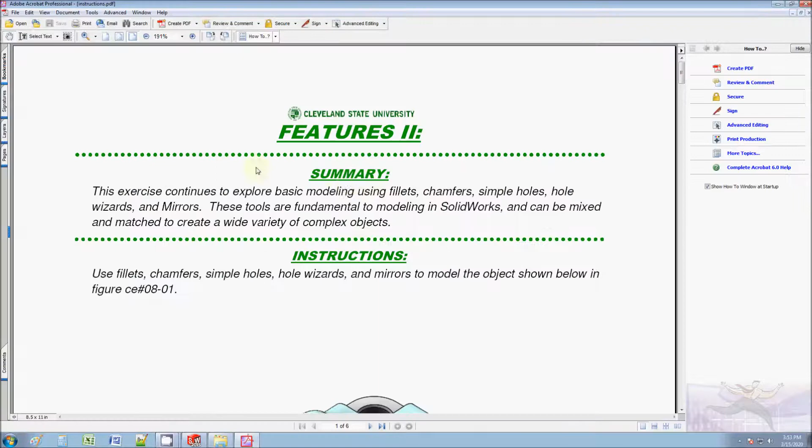Okay, so today we're going to talk about features 2, which is just a continuation of modeling in SolidWorks. We're going to learn how to create these fillets here, the chamfers, but more importantly the Hole Wizard. The Hole Wizard is a tool you use very frequently. It lets you build all kinds of counterbores and tapped holes and things like that.

And one of the main benefits of it is that if you use it right, you can extract the whole nomenclature on your drawing, which can save you a lot of time. So you will see the benefit of this tool as we progress through this tutorial. As you can see, there's no start file. Everything's going to be built from scratch, but we do have the solution.

So what I'm going to do is just start creating a new file in SolidWorks, and we're just going to create a new model from scratch. Here's a new model. I'm just going to set this up. Remember, anytime you create a new model, you have to change the options, tool options, change the standard to ANSI and change the units to IPS. We're going to do that for every model. Also, it's good to save your model. I'm just going to save it as exercise number 8, and now we're ready to go.

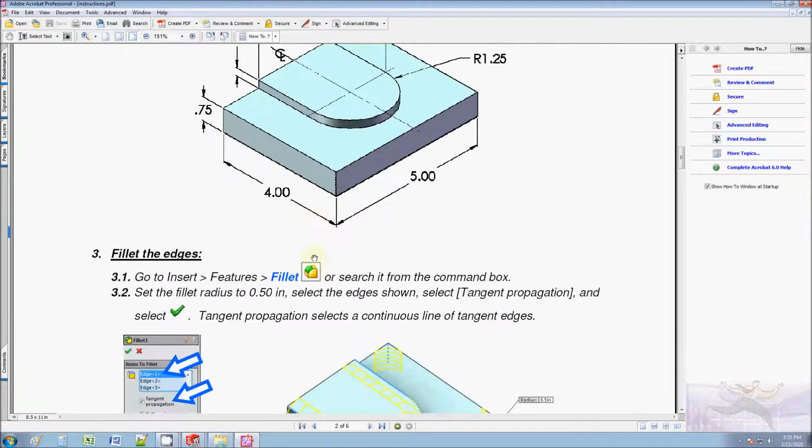So if we look at the first step, we're not given a lot of direction as far as how to build this. So we're really relying on you to review what we learned in the last tutorial. There's a lot of ways you can go about this. You can build this with 2 extrusions, one extrusion for that, another extrusion for that. You can build this with one oversized extrusion and then an extrude cut, just like they would in machining. In machining, you start with an oversized block and you mill it down.

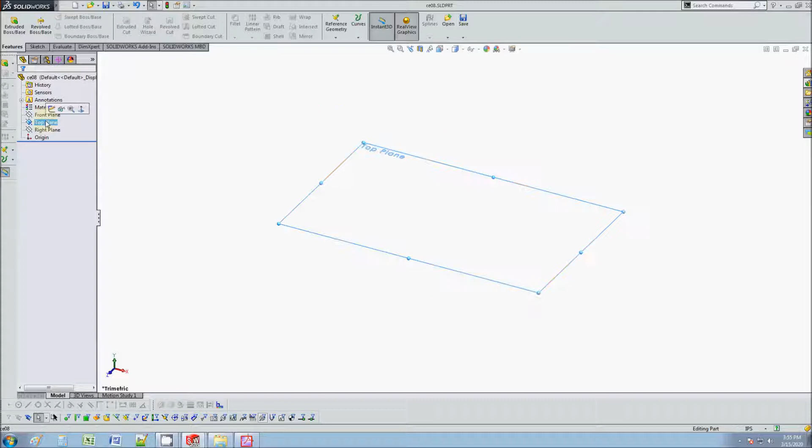Or you can build this from the side. You draw the sketch, extrude that back, and then use the revolve tool for that and extrude that towards the back. So as you can see, there's a lot of different ways you can approach this. So that's the first step. There's really not anything new here. It's a repetition of the last demo.

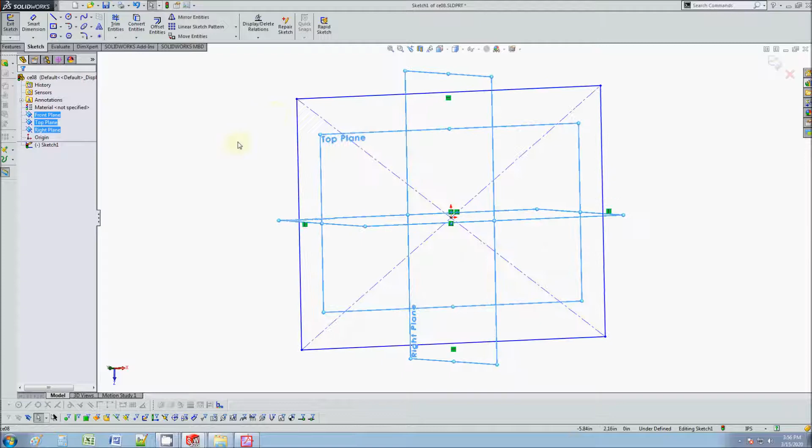So again, I'm just going to build this using the center rectangle tool on the top plane, because I feel like it's a flat piece that you would look at from the top down. And I'm going to snap to the origin. Again, that's very important, because this piece is relatively symmetrical. I want these to be centered about the model because it's really good practice. This is why I'm using a center rectangle tool and snapping to the origin.

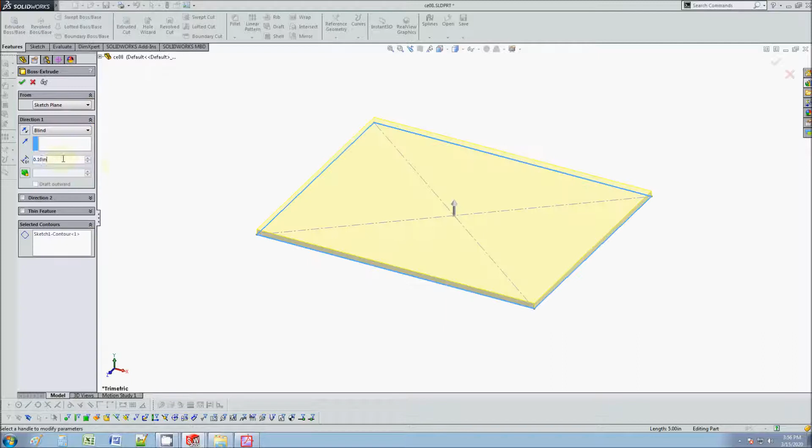And if I look at the isometric, I'll notice that this is 4 and this is 5. As you can see, this is fully defined, which is very good. For instance, if I deleted this, you see this is not defined. This is not good. It doesn't know how long it is. The model's got to know how big everything is. So this looks pretty good. I'm going to exit out, and I'm going to extrude this 1 inch: 0.75 plus 0.25.

So I'm going to simulate the way this is made in real life. Sometimes I've had machinists call me and say, I need to see how you build it because it's going to help me figure out how I'm going to program it on the CNC machine. So I always like to build the model like it would be made in real life. So that's 0.75, 0.25.

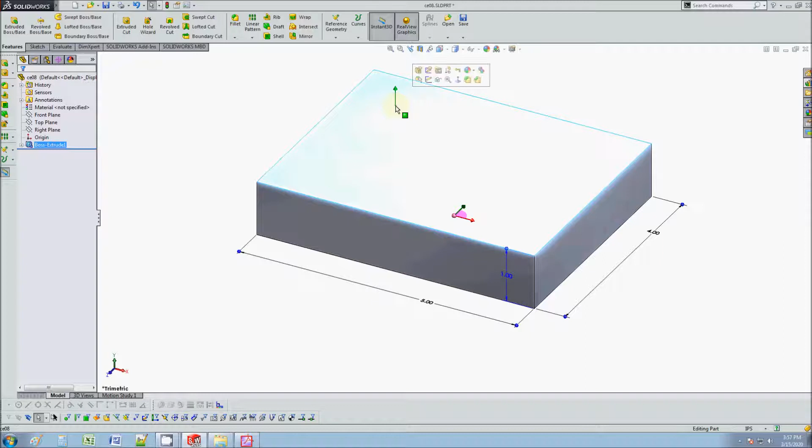So now I'm going to build this feature. I'm hitting Control 8 to stay normal to. I'm going to do that by sketching inside this feature. I need to draw the box of this. I could do it with a corner rectangle tool. I could just do this. But to show you another way, convert entities is also good for this.

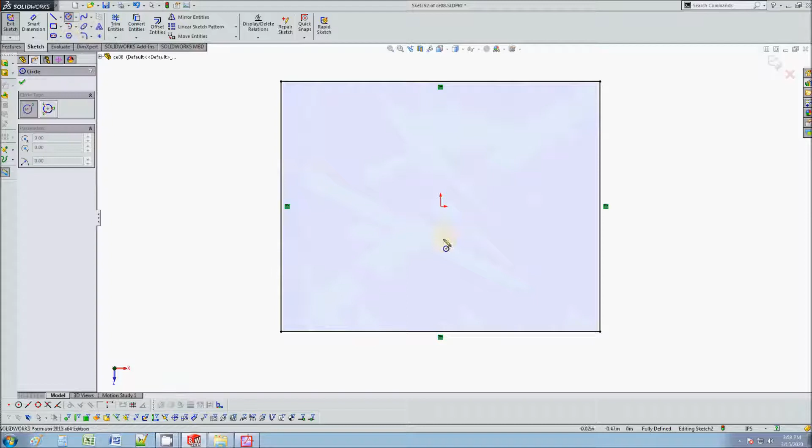The way it works is you select the edges, and you hit Convert Entities, and it converts the edge into a sketch. So I'm going to just use that just to show you something different. Then I'm going to continue on and draw lines and circles to match the sketch that we saw.

Here may be a new tool for you. It's called the Trim Entities tool. When you click this Trim Entities tool, there's a power trim, meaning you just click, hold the left mouse button, drag and drop, and it trims anything in its way. I like that tool because I remember in ancient AutoCAD programs you had to pick what you extend, what you trim, it's a couple clicks, but with a power trim you just drag and drop, and it's pretty cool. So that looks pretty good.

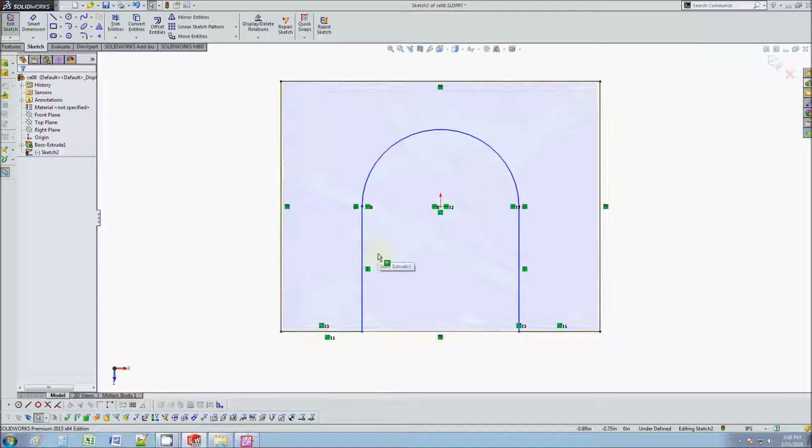I like it, but again, it's not defined, and the reason for that is because I didn't put a 1.25 dimension. So I'm going to go ahead and put a 1.25 dimension on that line. And as you can see, it's fully defined now. So there's many different ways you can approach that using the tools that you see here. I'm going to exit out of the sketch.

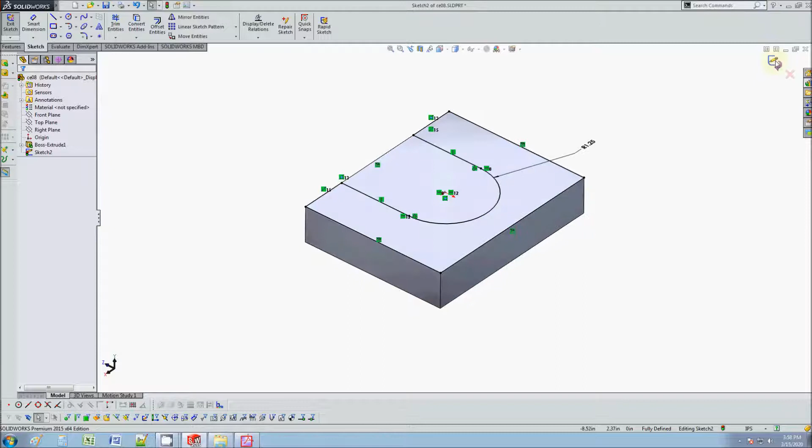I'm going to hit Features and hit Extrude Cut, and I'm going to set this to 0.25. It knew what I wanted to select because there's only one sketch to select, but if it didn't know, I would have selected it here from the tree. This is 0.25, cuts in just like that, and looks good. Okay, moving on to step 3.

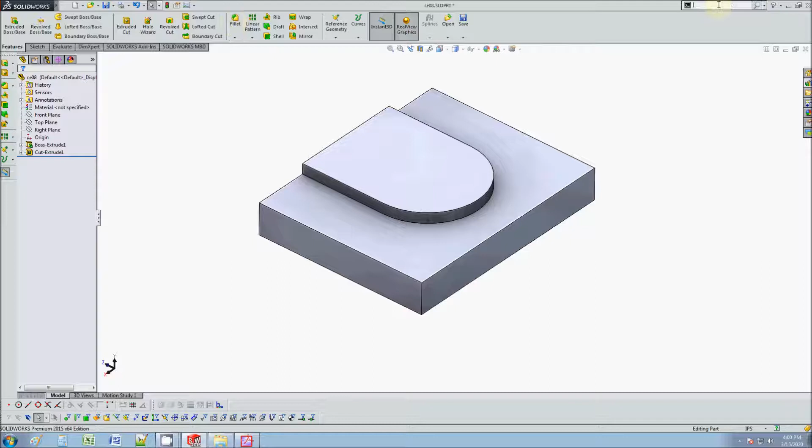We're going to learn about the fillet tool. So here's the fillet tool. You can also find it here. And there's many different fillets that are out there: variable fillets, full rounds, all of that. Fillets are really just to make the part more ergonomic, meaning it's easier to use, it doesn't hurt the operator.

But you usually just spec that on an injection molded part so that it can easily eject from the mold, and also because it makes sense for injection molding. But for machining, it doesn't really make a lot of sense. Usually you put a chamfer if you really need to break a sharp corner. Fillets are mainly for the injection molding industry, not really for machining. So let's talk about how you implement them.

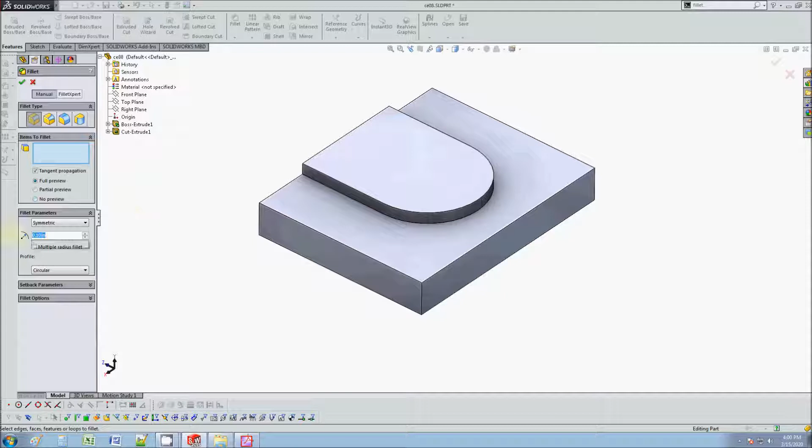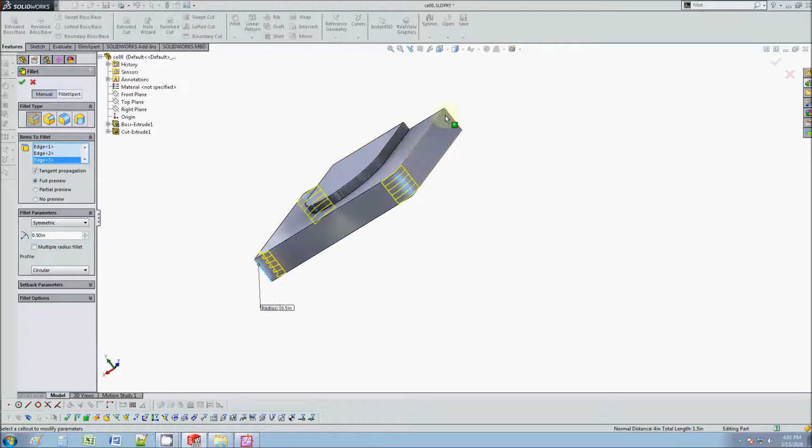First, you put a dimension here for the size, and then you pick the edge that you want it on. You can also select it asymmetrical, so if you want some sort of elliptical fillet, you can do that too. But we're just going to stick to symmetrical for today. We're going to stick to 0.5, and we're going to select each of these edges, and also this edge on the top.

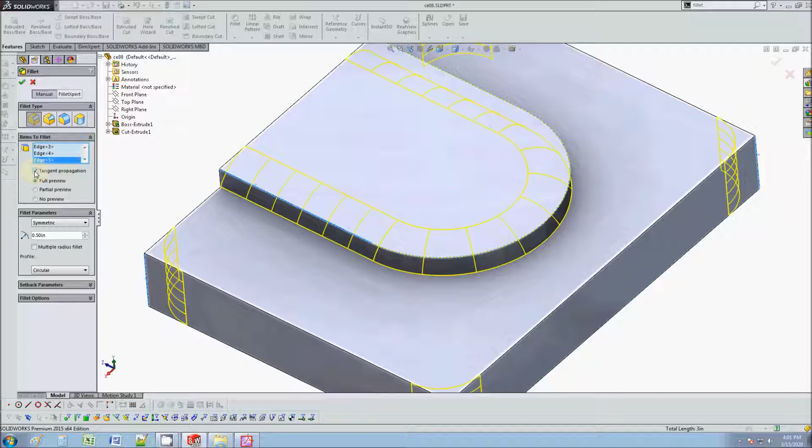Do you notice how it transitioned that edge all the way around? It's because I have tangent propagation on. If I turn it off, you'll notice that the fillet is only on one edge. So as you can see, it can be either or. This is a very useful tool. In some cases you'll need that, in other cases you won't need that. So just be aware of that.

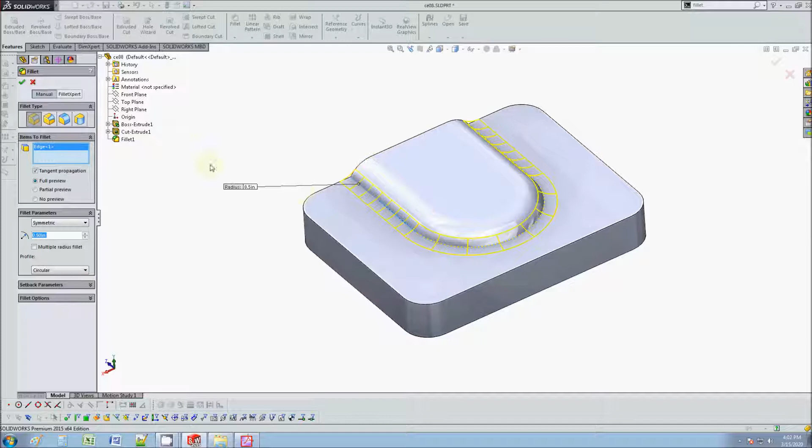It's also a good idea to put a fillet on top of another fillet. What I mean by that is it's good to do fillets in multiple steps, because sometimes you can't get the effect that you want in one step. So when that happens, I just select the fillet tool again and add another fillet. For instance, if I tried to do that in one step with this, it'd give me a lot of problems. So it's very common to put fillets on top of other fillets.

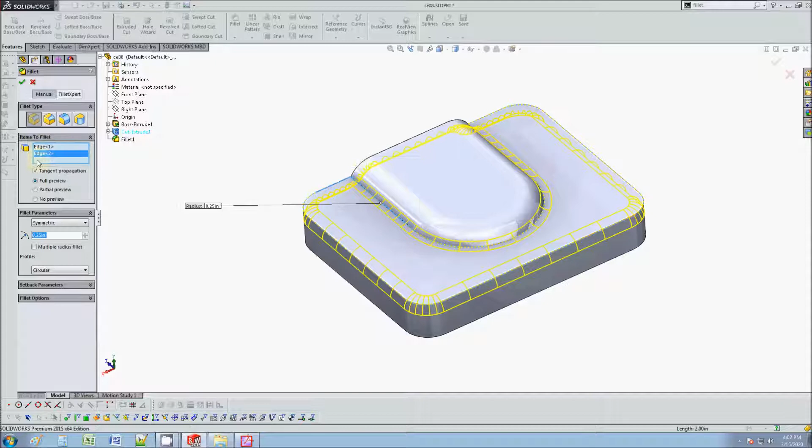In this case, I'm going to do a very special fillet. I'm going to select this whole surface, change this number, and as you can see, it figures out that I need a fillet on all those edges. I could have done that by just selecting each edge like this. But just wanted to let you know, you can select not only an edge, but also a surface, and it will figure out all of the edges around that when you include the fillet.

Okay? So that's what that looks like. And as you can see, you can go back in time anywhere you want, okay, to see every step.

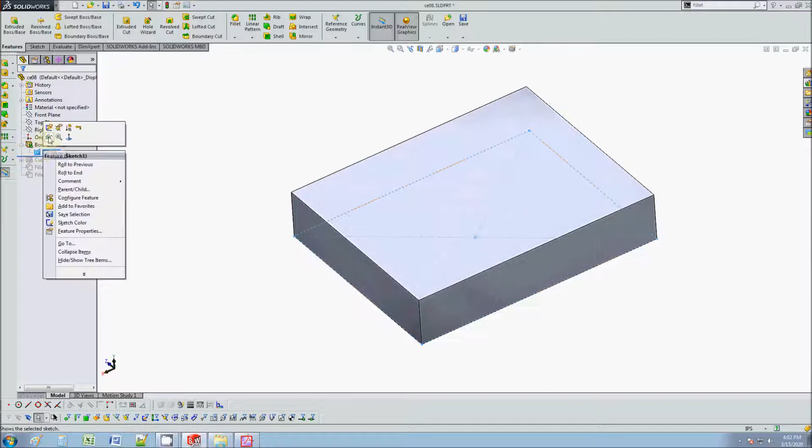Another thing I wanted to talk about real quick is when you create a sketch, I mentioned that you can type in a number, but you can also type in an equation. I'm not sure if I went over that. So for instance, you can type in 2/3 and it figures out that value as an equation. You don't have to put 0.67 directly. And also you can put an equation.

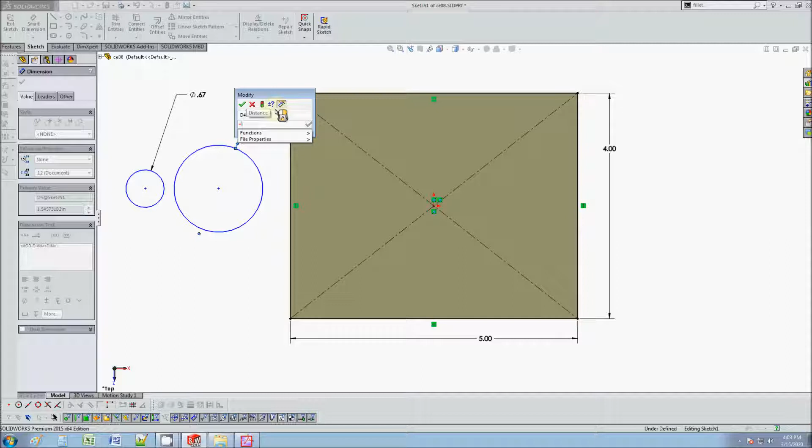So just like Excel, to start an equation you gotta hit the equal sign. If I put an equal sign, you can put an equation. So just like Excel, you set a reference, then let's say we want to do times 3. Alright, so now this says that this diameter is 3 times the size of that one. When you do that, you get a sigma. It means there's an equation tied to that value. So now when I change this to 1, you see this automatically updates by 3.

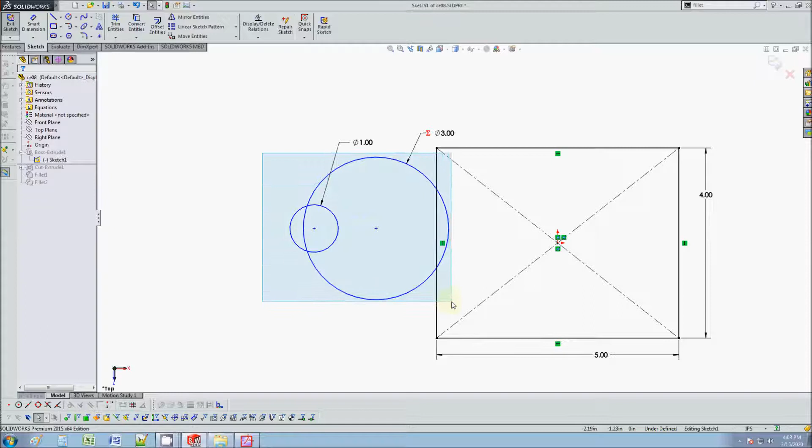So a lot of suppliers, a lot of companies that use SolidWorks, they like to use the equations because it's easier. It updates. It makes the workflow a lot easier because everything updates in one shot when you use an equation. Okay, so I'm just going to undo that, because otherwise I'll get a bunch of errors.

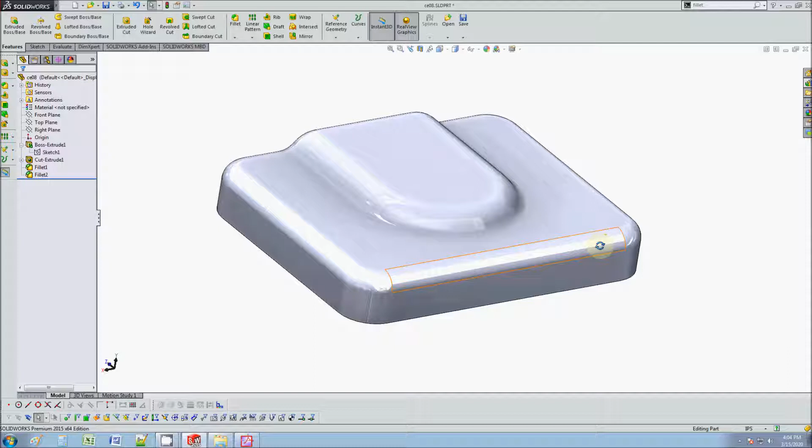And sometimes I've noticed that when you get an error, it's best to just delete and start over, or just hit undo, as opposed to try to troubleshoot it. Sometimes that tends to save you some time and tends to be an easier solution.

Okay, moving on to the next tool, which is the Hole Wizard tool. So again, there are two main benefits to using this. One is that it extracts all of the hole nomenclature on your drawing, and also that it uses industrial numbers that are uniform across the industry, which will save you a lot of time. So I'll show you how these two things are going to be beneficial for you later in the tutorial.

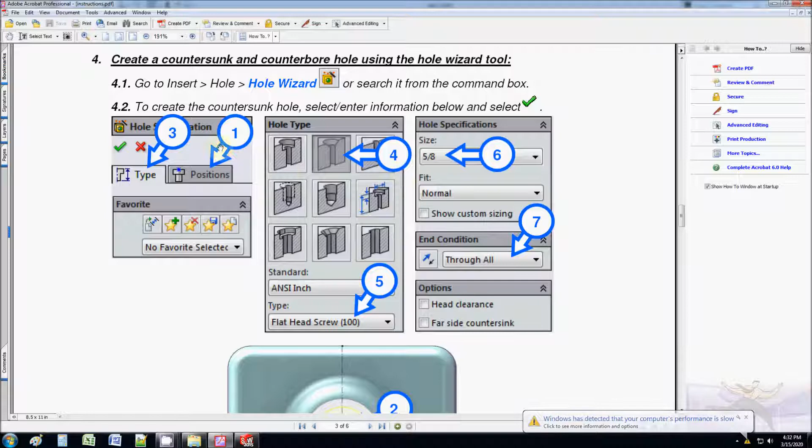So when you follow this guideline, all you got to do is just follow the steps. There's step 1, step 2, step 3, step 4. So that's how you use the Hole Wizard tool. So we're going to go ahead and use the Hole Wizard here.

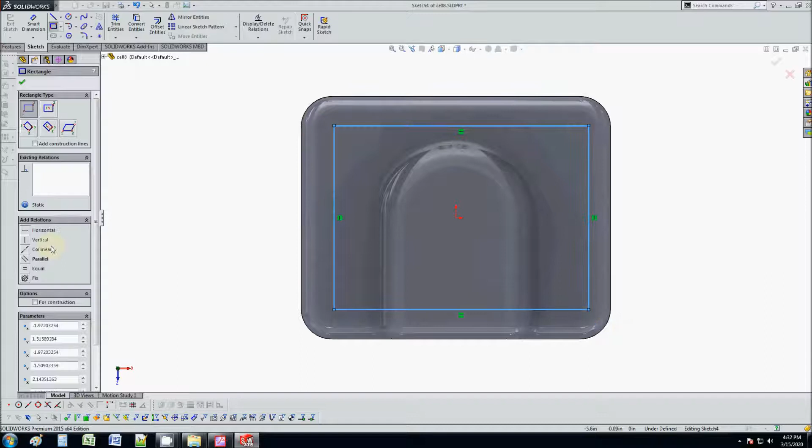Now traditionally when you set the position of the hole, you first create some sort of array box like this, set it for construction, and then you kind of snap to each location just like that. Okay, that's kind of the traditional way, and then you start dimensioning this grid. That's kind of like the traditional way of doing this.

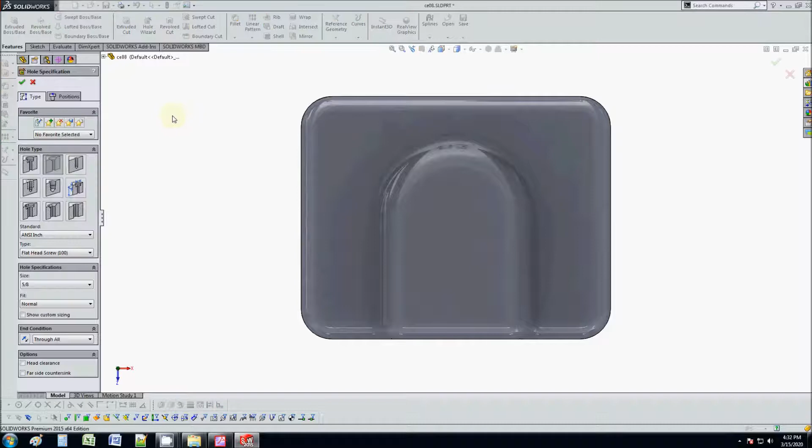But I made it a little bit easier for you on this tutorial. The way we're gonna do this is really just by snapping to the origin, just because you're getting started, and that should be good enough. So anyways, it's located there, and then if you follow the balloons, step 2, select the type, which is a countersink. Then you select the angle, which is 100 degrees. They only sell these in 2 different angles, so it's going to be 100 degrees.

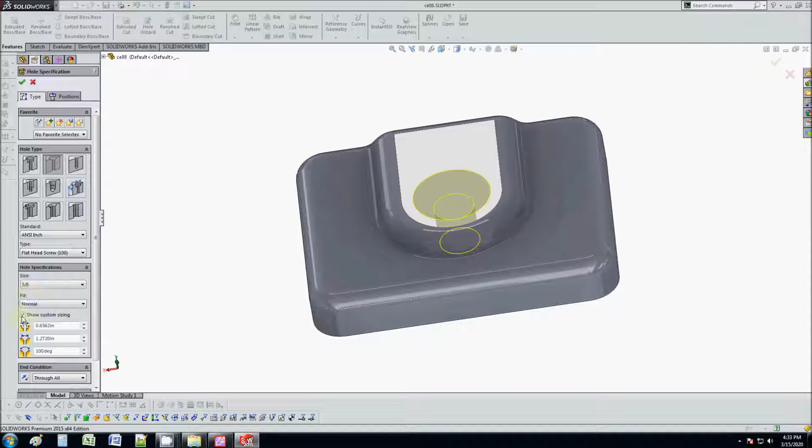This one's going to be 5/8 for diameter, and it's going to be normal fit, meaning the inner dimensions are going to be normal. So if you pick close or normal or loose, you can see how this is getting larger and larger. If you need to deviate from the numbers of the 5/8, you can hit custom sizing, and you can change these numbers to anything that you want. And it's going to be a through all hole, just like you see here. Click OK, and there it is.

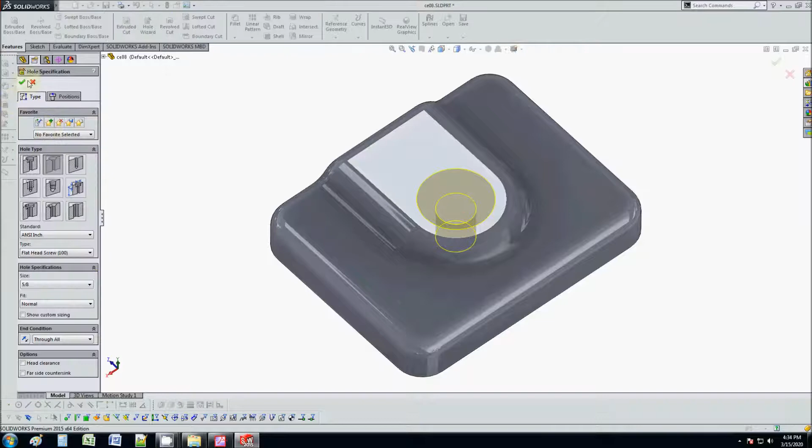There's the result. Okay, so now if you want to modify this at any time, it's very easy. Just edit feature. You can modify the sketch anytime, you can modify any of these features anytime, and you're good to go. Okay, so let's practice this a little bit more. Let's use the Hole Wizard tool to create a counterbore on the corner here. So I'm going to go to positions, going to hit Control-8 to stay normal to.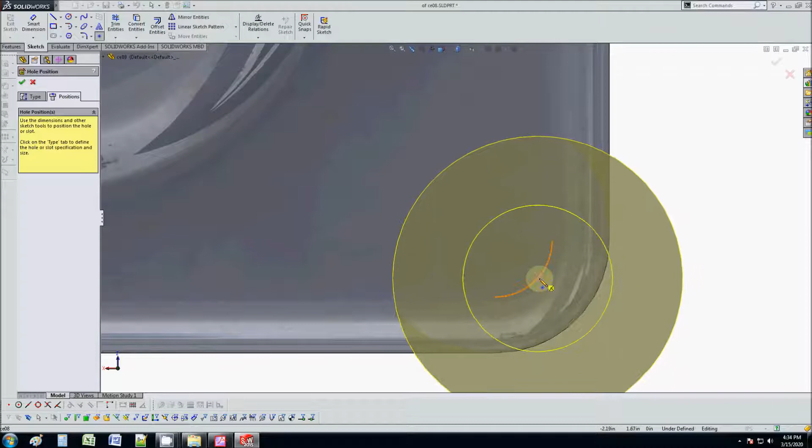Actually, it's not what I wanted, so I'm going to hit the arrow keys to kind of increment my angle. And I'm going to pick this surface. I'm going to make a hole that's concentric about this fillet. So I'm going to hover my mouse over the edge here and then just snap to that center. Then I'm going to use a counterbore for this, just like the tutorial.

Okay, we're now on step 4.3. So this is a counterbore. It's not for a socket head cap screw, it's for a socket head shoulder screw. Socket head cap screw is probably the most standard hole type that you use in machine design. The socket head cap screw, 1/4 bolt, that's like where you start. But the shoulder screw is what we're going to use today.

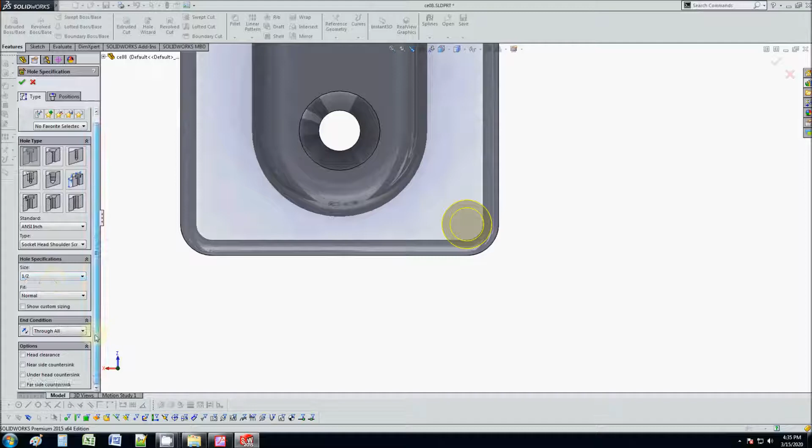Okay, so shoulder screw, socket head shoulder screw, 1/2 inch. Fit is normal. 1/2 inch is actually the diameter of the shoulder. It's not the head, it's the shoulder diameter. And everything else is going to be okay, just like that. So there's the shoulder screw. Now let me show you why this Hole Wizard is so useful. So let me save this.

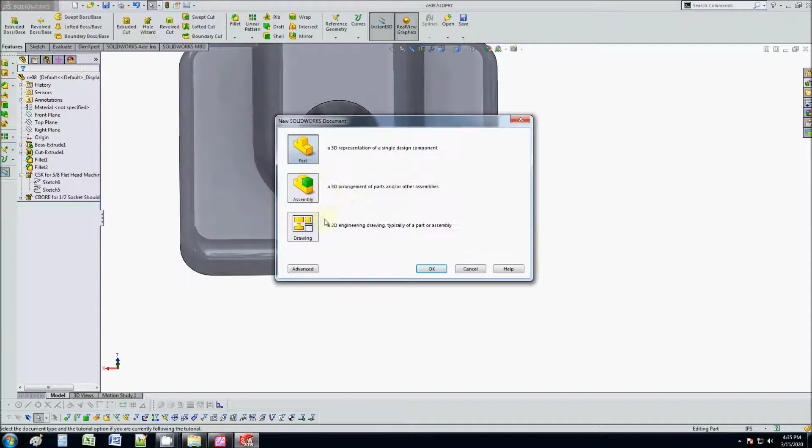Well, the first reason is, let's say I were to create a drawing. We're going to learn about drawings in a future lecture. But let's say I created a drawing and I inserted this model that I just built. Alright. Okay. See this? With just a click of a button, I get all that nomenclature, right?

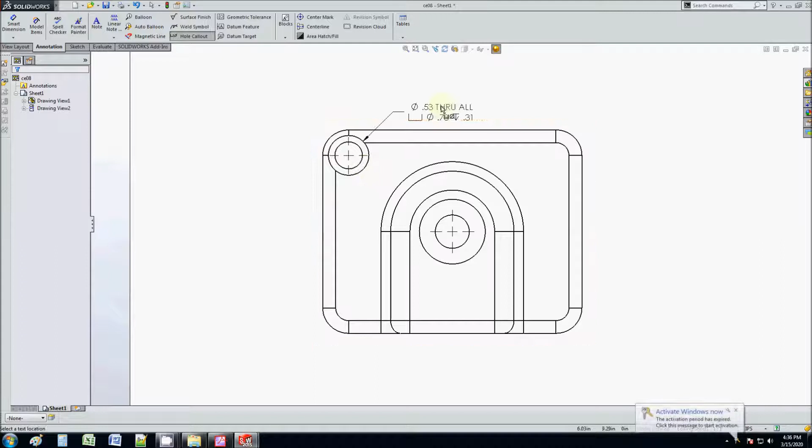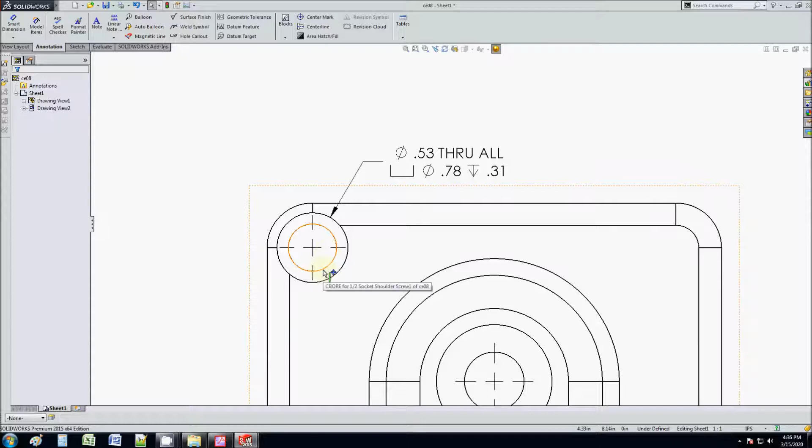So remember, a few weeks ago we learned about what this means, and we learned about these symbols. It was tedious to draw that by hand, and it was prone to error. But with the Hole Wizard tool, everything is generated in one shot. If you used the Extrude Cut tool twice, you would not get all this nomenclature. And the nice thing is that you can modify this at any time too.

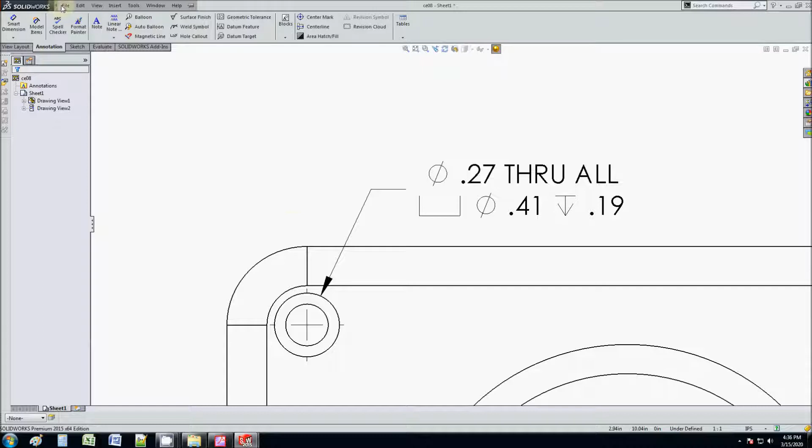If you want to turn this into a 1/4 inch hole, you can do that. And watch what happens when you go back to the model. See, it updated all these numbers. Okay, so that's the first benefit of the Hole Wizard tool. The second benefit is that these numbers are standard. Let me show you what I mean. Let's go back to the 1/2 inch. These numbers are standard.

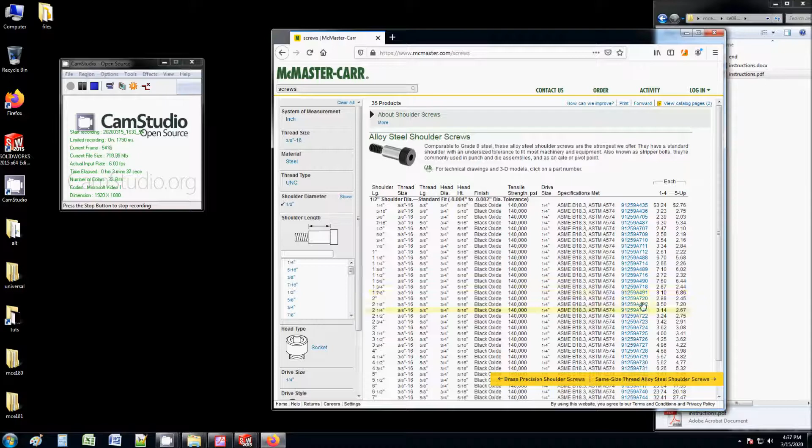So let's say, for example, I'm going to save this. Let's say I went on a supplier site, McMaster-Carr, and I wanted a shoulder screw, diameter 1/2 inch. Okay, let's pick this one. Let's say we want this bolt.

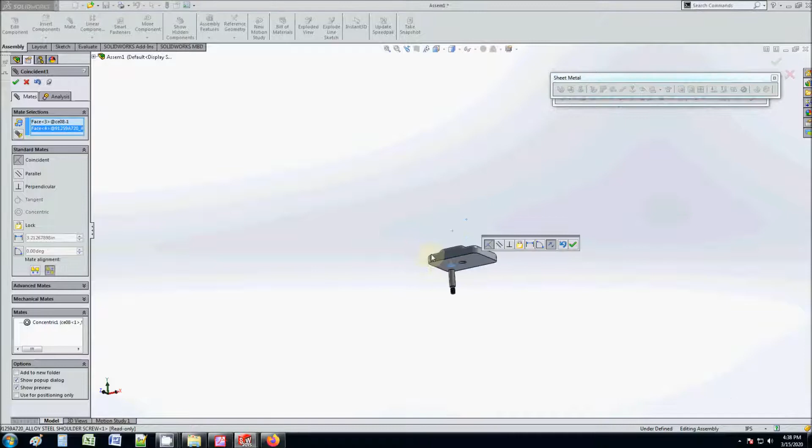So let's say we create an assembly. We will learn about assemblies later. We import our model, and we import a bolt. This is a 1/2 inch shoulder screw that I spec'd. This is a 1/2 inch shoulder screw I imported from a supplier site. And watch what happens when I put the two together. As you can see, they both fit perfectly. Look at that fit. That's the advantage of the Hole Wizard tool.

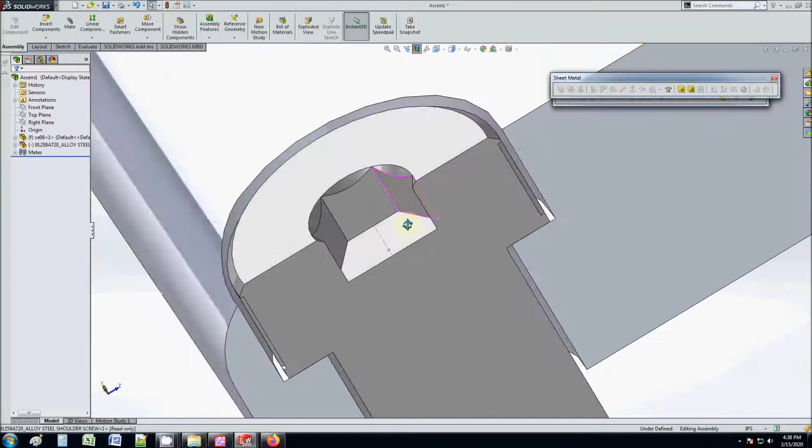I don't have to look at some catalog or some industrial standard and see what's the diameter of a shoulder screw, what's the depth of the head. If I use the Hole Wizard tool and I just spec a 1/2 inch shoulder socket head cap screw, look at that clearance. It fetches all the values from the industry so that I get a perfectly clean feature.

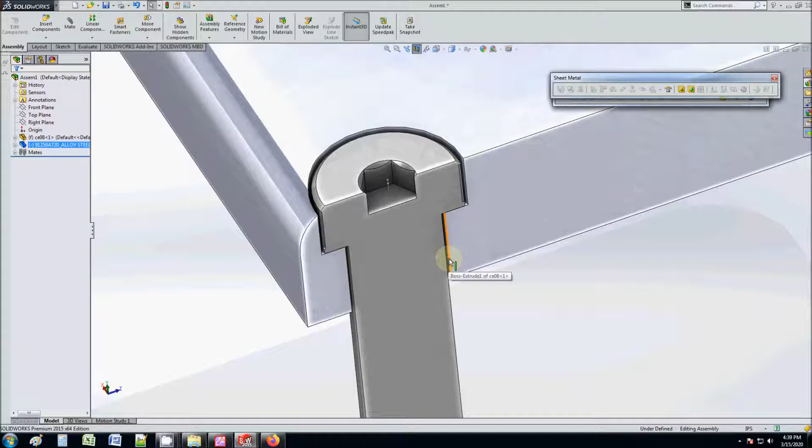All right. So this is really good for us. So again, if you need to create a counterbore or a tapped hole or anything like that, don't just use the extrude cut tool. Use the Hole Wizard tool.

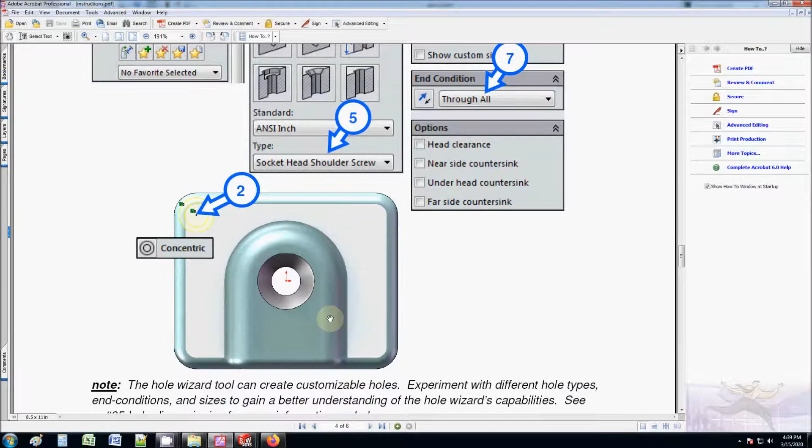Okay, so now let's go back to our model. The next step is to add a relief. We're going to cut this off here. As you can see, I'm going to shave it off. Sometimes engineers, when a counterbore is close to the edge of a model, like to shave off the side because it's a thin feature.

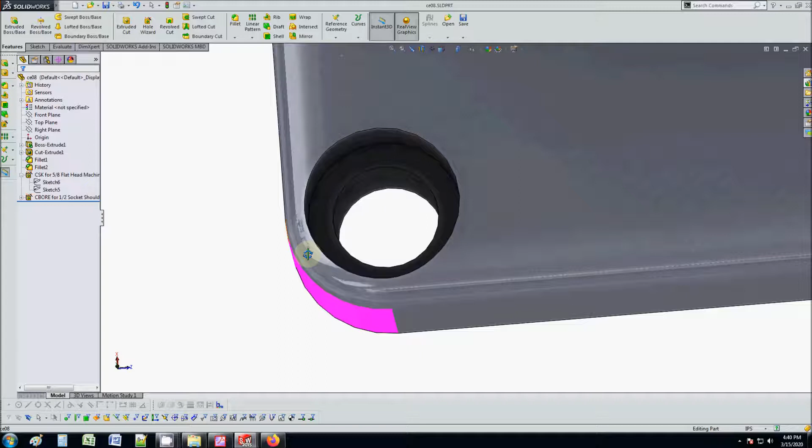A thin feature is not desirable in design because it wears out quickly. It's not a strong design. So anytime you see a thin feature, you want to eliminate that. You want a robust, strong design. So when the counterbore is towards the edge, usually you shave that off. If it's in the center, it's alright, but if it's towards the edge, you want to shave it off. So we're going to do that using the extrude cut tool.

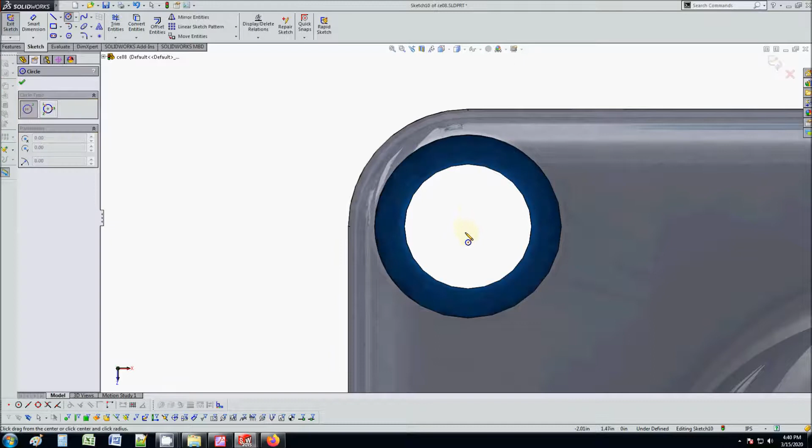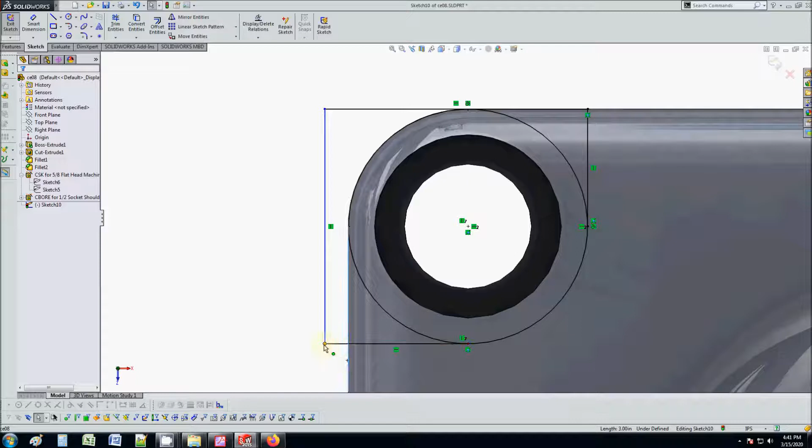Okay, so what I'm going to do is just draw. I mean, there's so many ways you can approach this. I'm creating a sketch on this surface, if you noticed. And I'm going to just draw a circle here. And I'm going to snap. I'm just drawing a box. Alright, I'm drawing a box. And I'm just adding some relations. You see, I'm just making these connect. Okay. Hope you understand what I'm doing here.

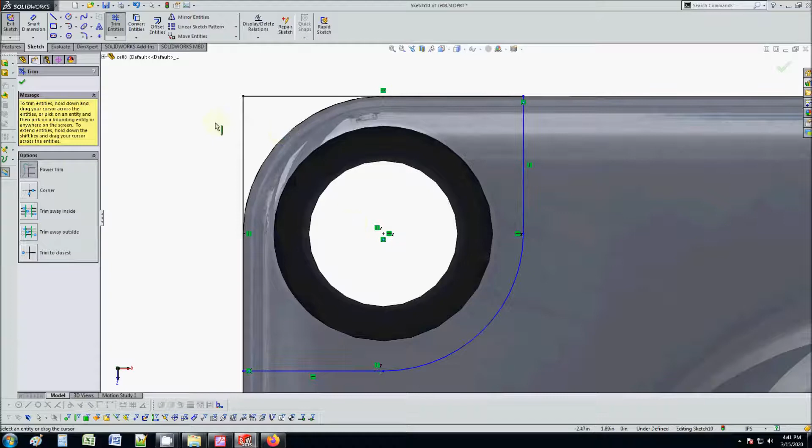I'm just drawing. I'm drawing a shape that I'm going to use to shave off the edge. I don't know why this just jumped. That's alright. I'm just going to add another relation. Okay, there's many different ways you can approach that. Using the relations that you learn, using the sketch tools that you learn, I'm sure you can figure out a way to create the sketch. But what you gotta understand is the process.

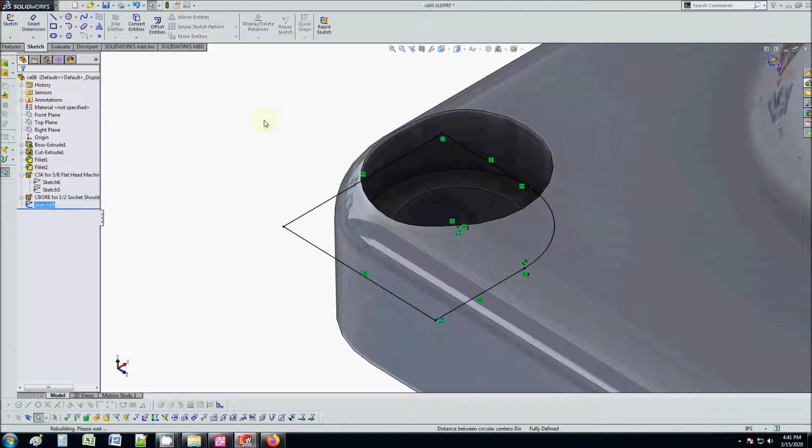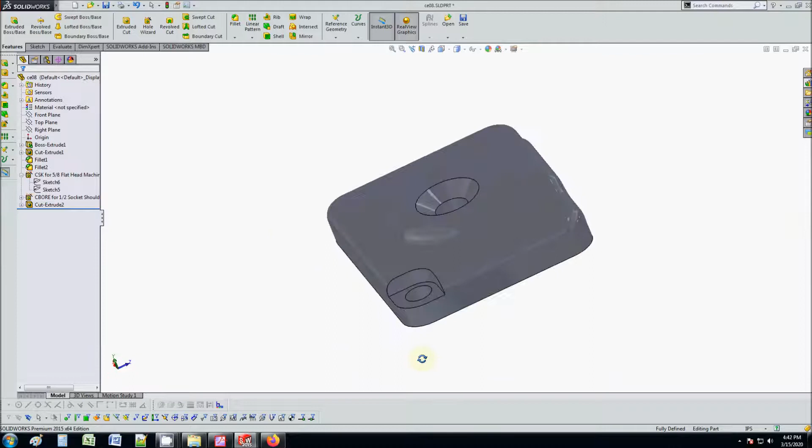I'm selecting the surface, I'm creating a sketch on it, and now I'm going to exit out of that and use the extrude cut tool and go all the way through all. The other way. See this arrow? Click the arrow. It's gonna cut through all. And see what you get here? You get a very nice, clean relief. So this is a lot better than leaving that thin feature there. Okay, don't be lazy about small stuff like that. You want to have a clean geometry. All right, so that's how you create the relief.

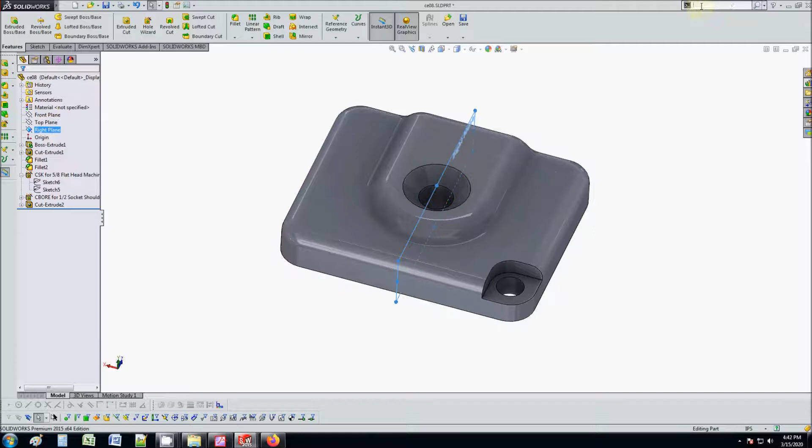Okay, now what I'm gonna do is, since the same piece is everywhere, I'm going to mirror it. I'm not gonna just build the relief and the hole 4 times, you don't want to do that. It's just a waste of time. So I'm just going to mirror this twice. Okay, so you hit mirror, and you gotta pick the features. So I'm gonna pick this feature and the hole. If you're not sure what you're selecting, again, it's the counterbore and the relief. I could have renamed this relief to make it easier, but that's what I'm essentially doing.

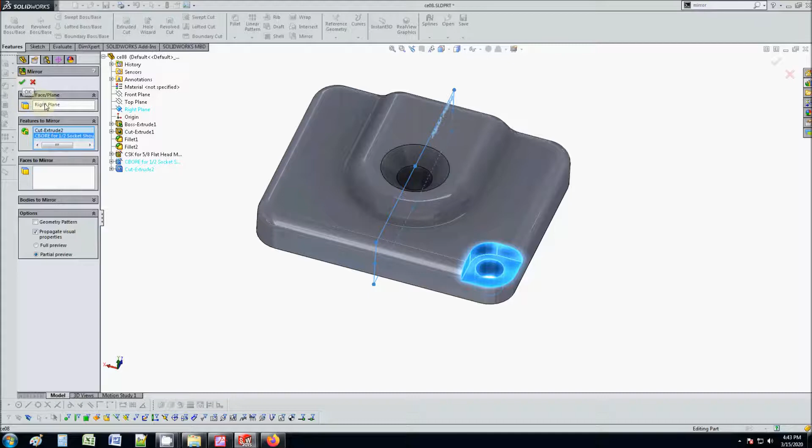Mirror about the right plane. So let's see what we get when we click this. Okay, you see that? This mirrored over to the other side. And now what I'm going to do is mirror my mirror. You see, mirror on the front plane, mirror my mirror. So now what you get is the same feature on the other side.

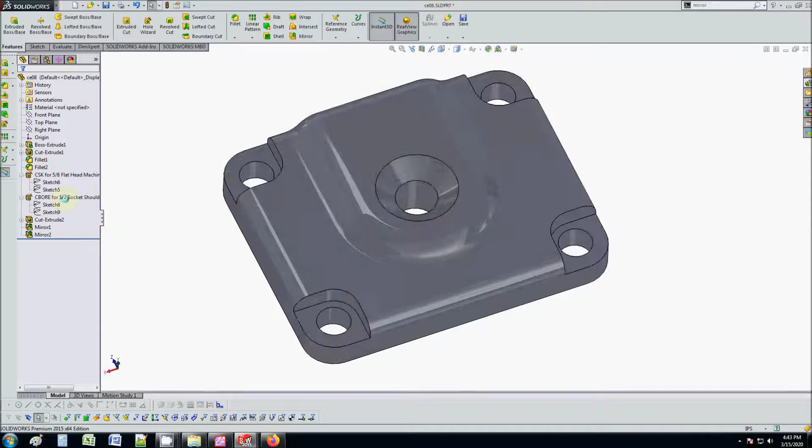So the reason I like working like this is because, say I want to change this. I don't want to change this 4 times. All I gotta do is just go back to here, or better yet, I go back to here. Say I want to change this to 1/4 of an inch. Look at that, all 4 update at the same time. And then all 4 update at the same time on my drawing too, right?

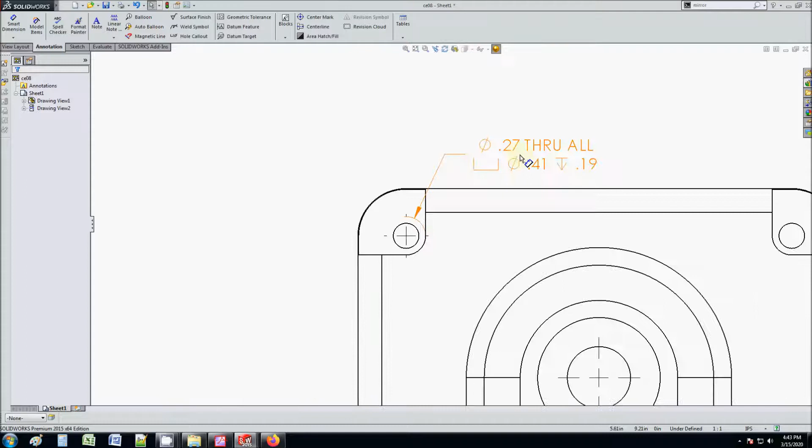So that's cool, because again, remember back in the 90s with CAD programs, you had to draw each of these lines by hand. This was drawn by hand, this was drawn by hand. There was no intelligence between the pieces, but with the new modeling techniques, now everything communicates. So with just a click of a button, my drawing updates, my assembly updates, my part updates, so all of that gets done in one shot.

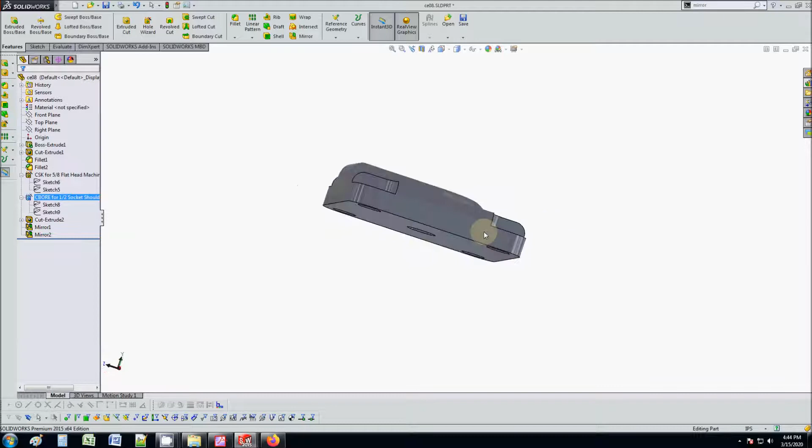Okay, so that's how you use the mirror tool. Okay, so let's see what else. Good. The chamfer tool is similar to the fillet tool. It's just kind of like a straight edge. Something like that.

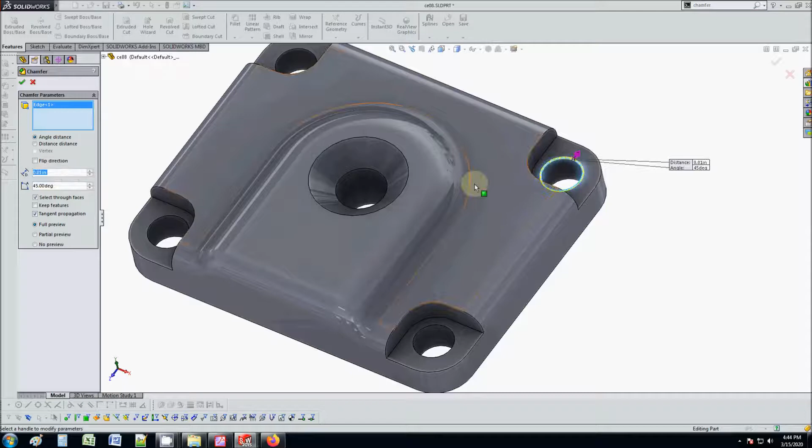Sometimes to deburr, if you remember, the burrs are kind of like these residual pieces of metal that stick out after you cut metal. It's good to chamfer that so that the burr is removed. So sometimes the chamfer tool can be good for that, but it's kind of understood to deburr your parts, so I tend not to model the chamfer, because sometimes I've had machinists call me and they say, "Hey, what's the actual dimension that you want this chamfer to be?"

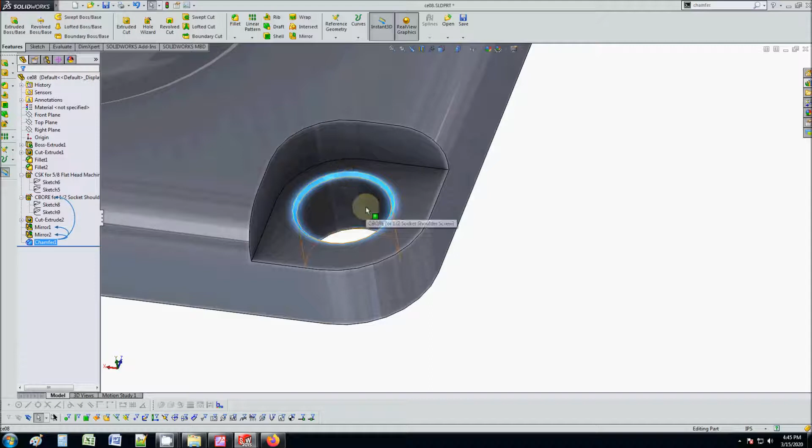And personally, I didn't really care about the angle. I just wanted it to be deburred. But I just want to show you an example of how the chamfer tool might be used, is to deburr a certain edge. An alternative to the hole wizard is the simple hole tool.

As you can see here. See the simple hole? It doesn't let you do as much as the hole wizard tool. It doesn't let you do threads or anything like that. But it takes less resources. It's lighter weight than the hole wizard tool. So sometimes you can use that.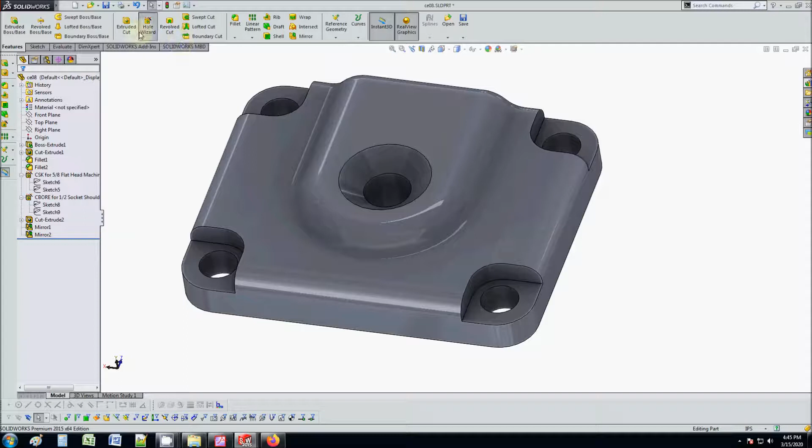Also, one thing to note with the hole wizard tool is when you create a tapped hole, let's say we want to create a tapped hole on here. Like I said, you can bypass any of these numbers. If you want something more specialized than what the default is, you can change that. You can set the blind depth for the hole. You can set the blind depth for the threads, and the threads are always going to be less than the tap drill depth, but you can spec all of those things.

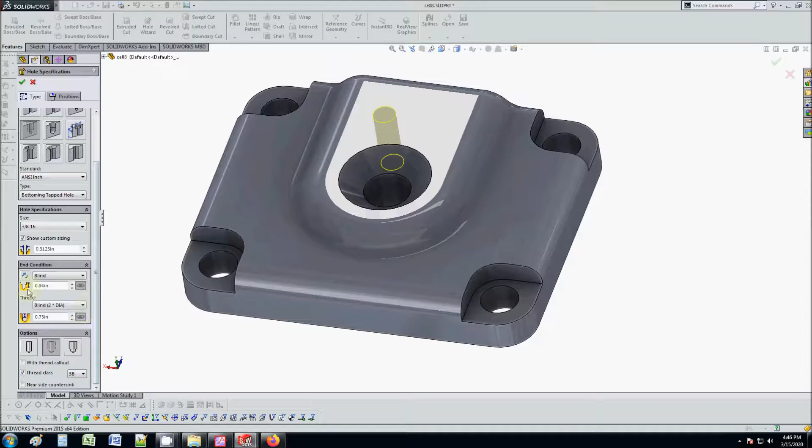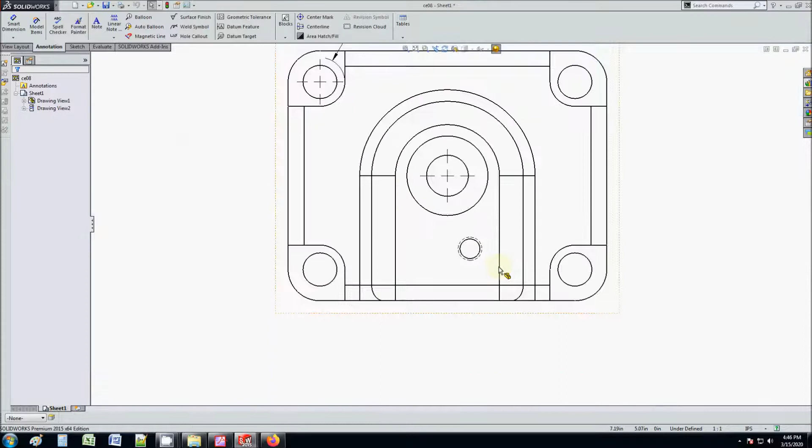You can change all of those values. And also, look at that, you can change the class too. Remember, one is tight, one's loose. You can change all those things, and what's cool is that all that is going to display. Like if we go back to our drawing, all that is going to display here. Look at that, it tells me the class. So you can modify all the things we learned about thread specification on the model here, and all of that can be changed.

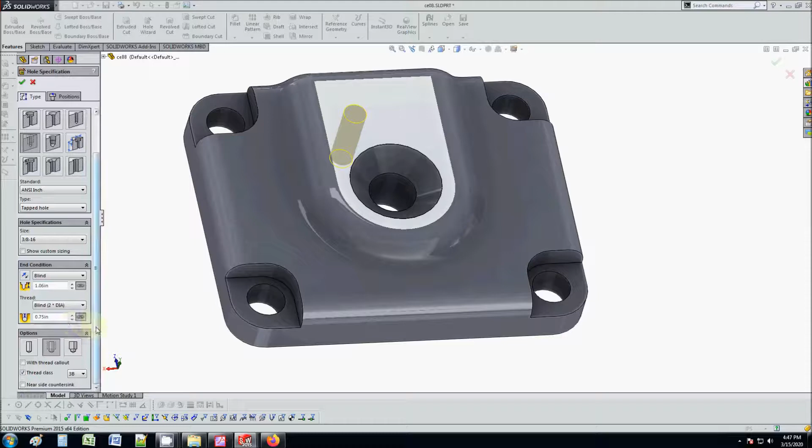So you even have NPTs for fluid distribution. You have countersinks, counterbores, clearance holes, tapped holes. So you have pretty much all of the major types of holes that are used in mechanical engineering. And if you messed up, you typed in something you didn't mean to type, you can hit restore default values, and it will reset the standard industrial numbers for that hole specification. So let me delete that.

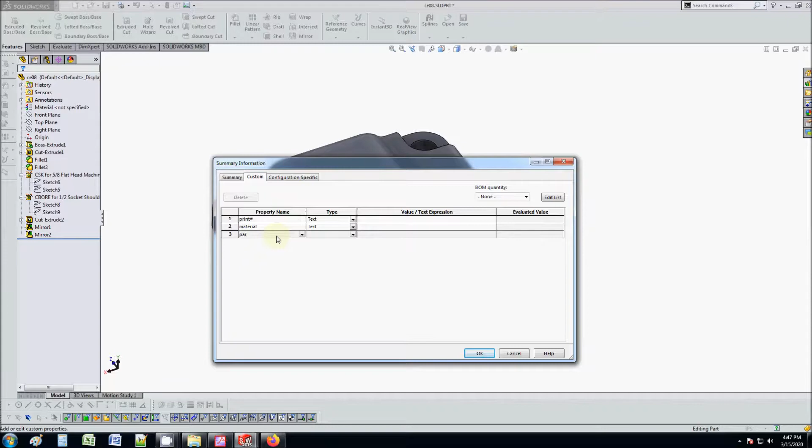Okay, so that's that. And then remember, when you're done with a model, always remember to add properties. We talked about that. This is so that when you create a drawing, those properties are going to extract. So you can hit material, print number, whatever you want. Just follow the tutorial. Add the properties as shown in the previous demo, and then you can type whatever you like here based on what the model has. And then finally, I always like to laser mark the model.

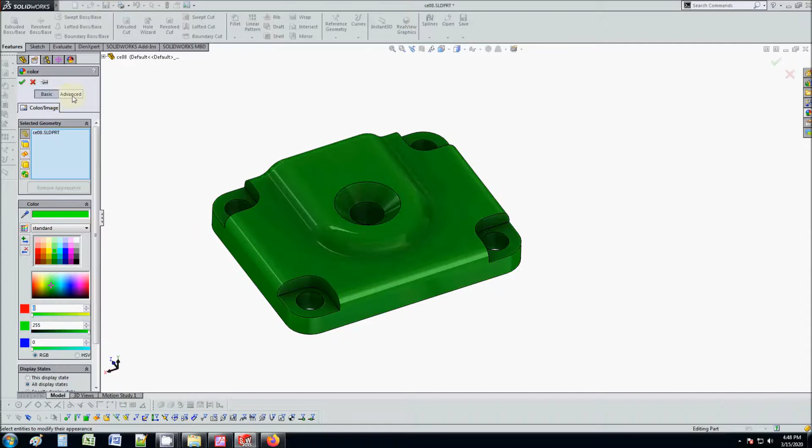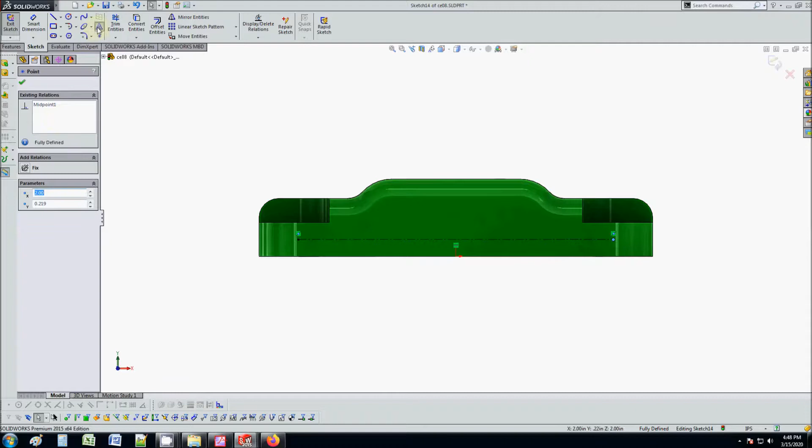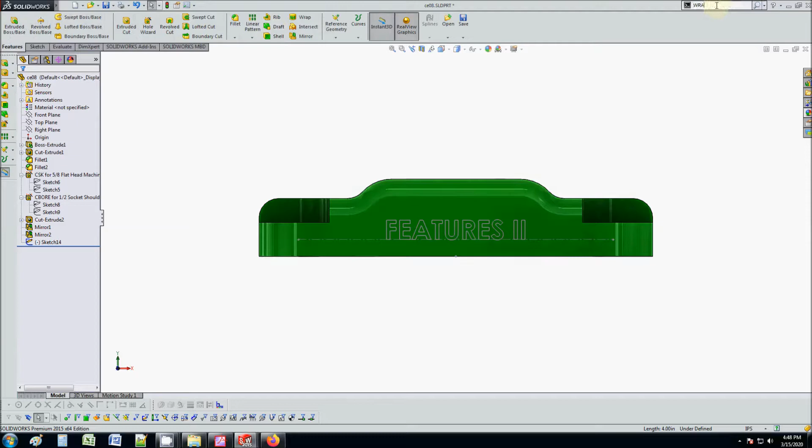So you're welcome to do that. Maybe this is some sort of cast product and you want to laser mark. So again, you can do that with the text tool. Just like that, and wrap it. The extrude cut tool also works just as good. On here, 0.1, and change the color to that surface.

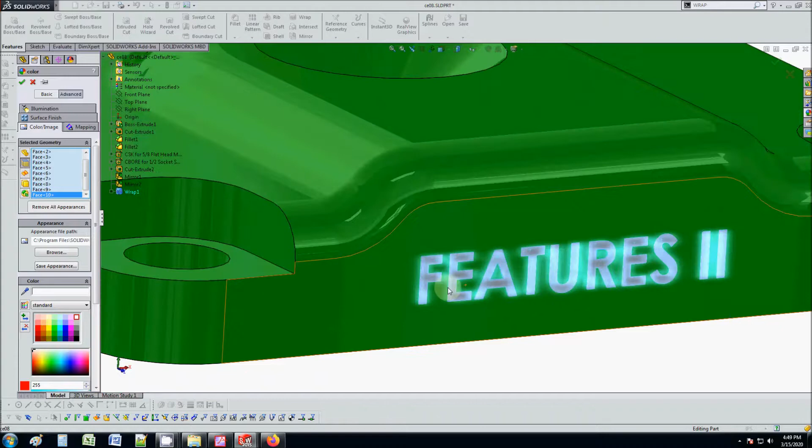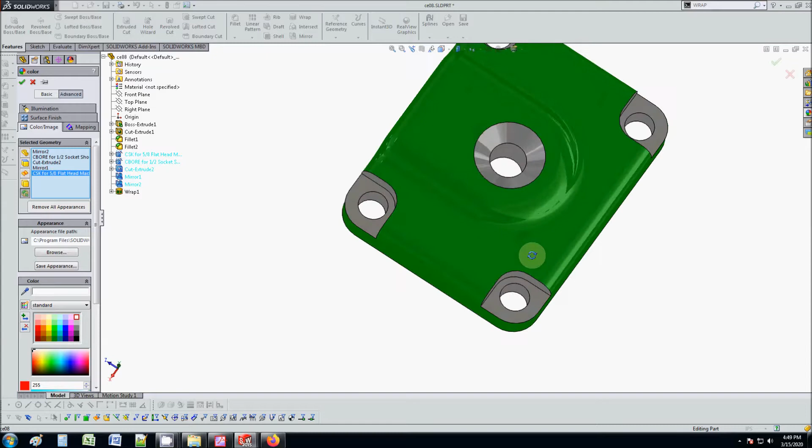Okay. Maybe you want to show that this is a cast product, and you want to show these are machined. And you can even change the texture of that so you get like this brushed machined look. You can change that through the textures and the bump mapping. There's all kinds of textures like for cast products or machined products.

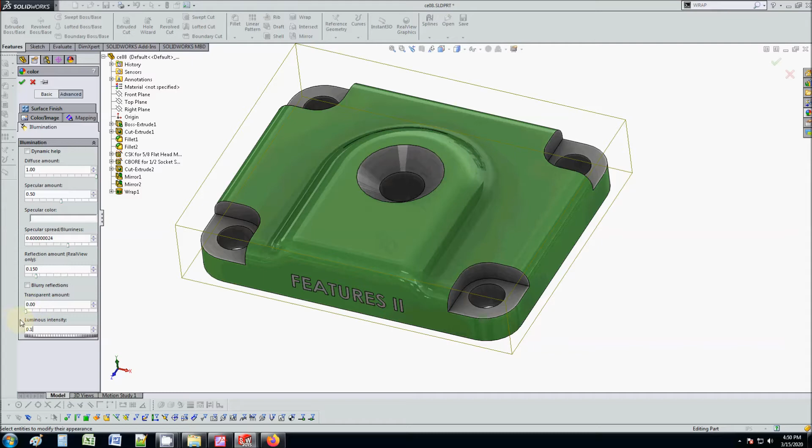You can modify all of those things, even here. You can change all of those properties. You can make it even more shiny if you want. Here's the reflection amount. So again, this concludes this tutorial. The main focus here is understanding the hole wizard tool, how to apply it, and how it's beneficial as far as the drawing is concerned, as far as mitigating errors when you design.